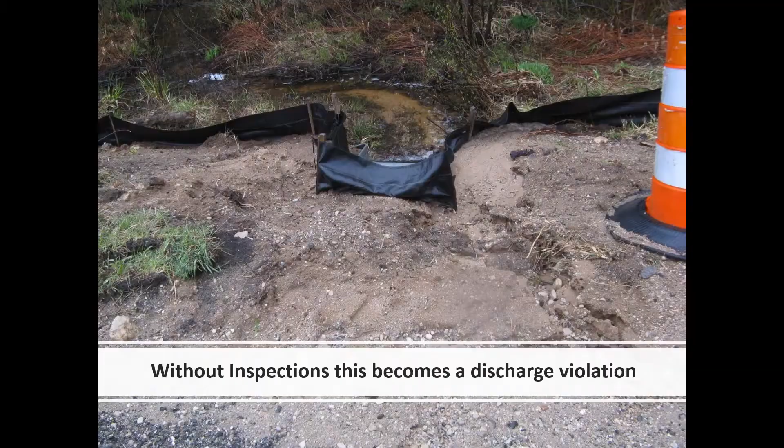The next item that EGLE staff will review are inspections. Adequate inspections and follow-up maintenance are essential to minimize erosion and off-site sedimentation at sites. We tend to hear about the major issues, right? Just remember, timely inspections and proper maintenance can help prevent smaller issues from turning into the major issues. It is the regular inspections that protect water quality and prevent Part 91 violations.

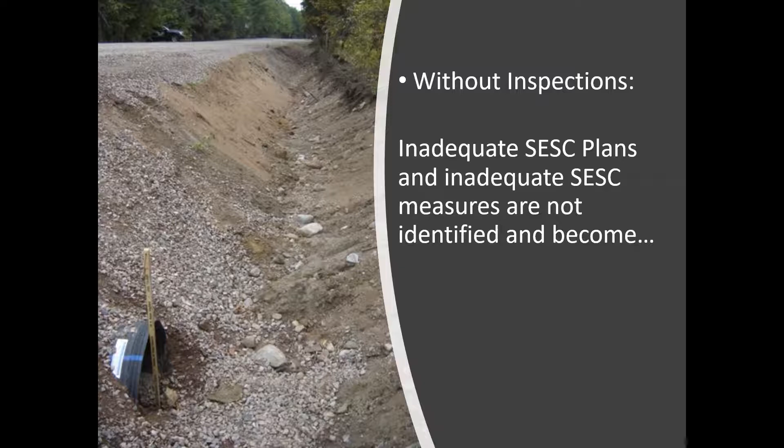Here we see silt fence in need of maintenance following a small rain event. Without proper inspections, this becomes a discharge violation to a stream and could become a major issue later on. Without inspections, inadequate SESC plans and SESC measures are not identified and could become a discharge violation 2 weeks later after rain. A lot of sediment can be moved in an unstable ditch, even in small rain events.

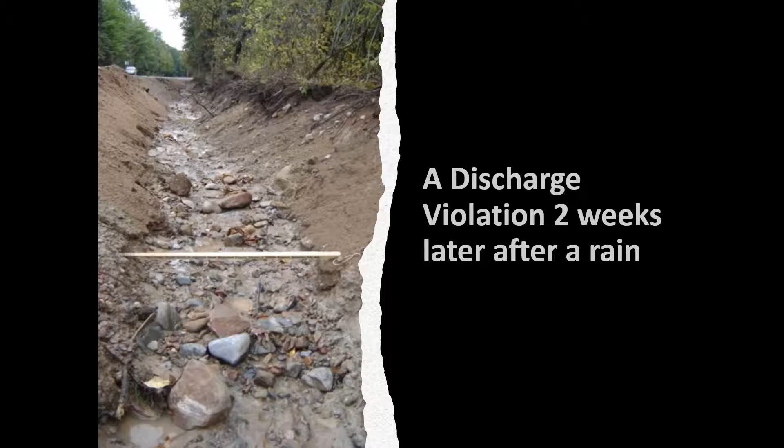A common question we receive is, what is the inspection frequency required by an SESC agency? Part 91 outlines the expectation for conducting inspections but the details on the frequency of the inspections are not well defined. EGLE will expect MEAs or CEAs to conduct adequate site inspections to ensure minimization of soil erosion and off-site sedimentation. That means you will need to make sure you're conducting an adequate number of inspections to minimize soil erosion and off-site sedimentation. Proper documentation of inspections is one of the most missed elements found during our audits. EGLE staff will have no way to verify that you are performing your site inspections if you are not documenting them.

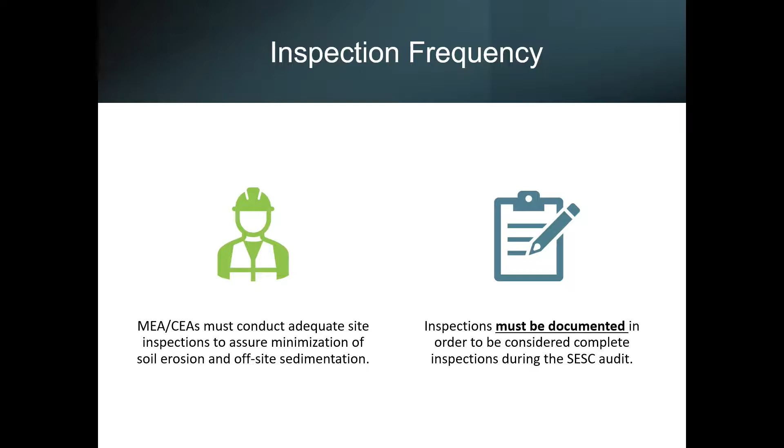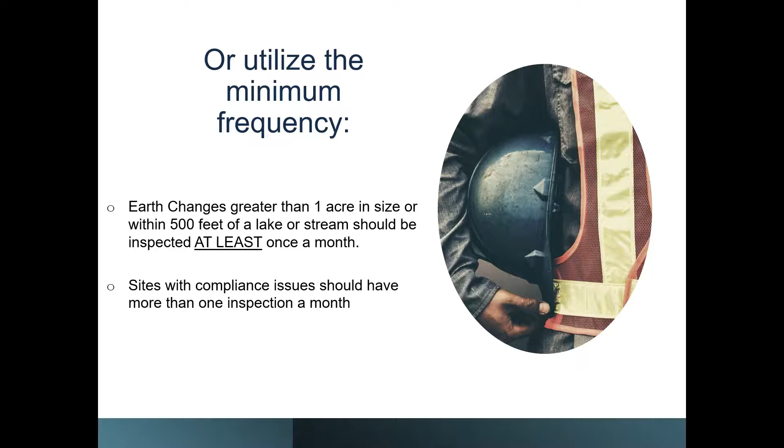One tool an agency may use to help determine the number of times a site needs to be inspected is called a site prioritization matrix. These matrices must be approved by EGLE and will define inspection frequency based on site risk factors, which can include the size of the disturbance, the time and length of the disturbance, flow conditions, the time of the year, soil types, or slopes. If an agency is not utilizing a site prioritization matrix, they should be utilizing the minimum inspection frequency. This includes inspections on any earth changes greater than an acre in size or within 500 feet of a lake or stream at least once per month. Any sites with compliance issues should have more than one inspection per month.

When EGLE is reviewing inspection records, we will expect to see that inspections are being documented in an inspection report. While there is no required form for inspections, EGLE does have a template available for use by agencies. EGLE staff will be reviewing the inspection reports for inspection quality. The minimum items that should be included on inspection reports are the conditions of the site and SESC measures, any needed corrective actions, if there were any previous corrections that were completed, the date, the inspector's signature, and these records should be maintained for 5 years so that EGLE can verify them during an audit.

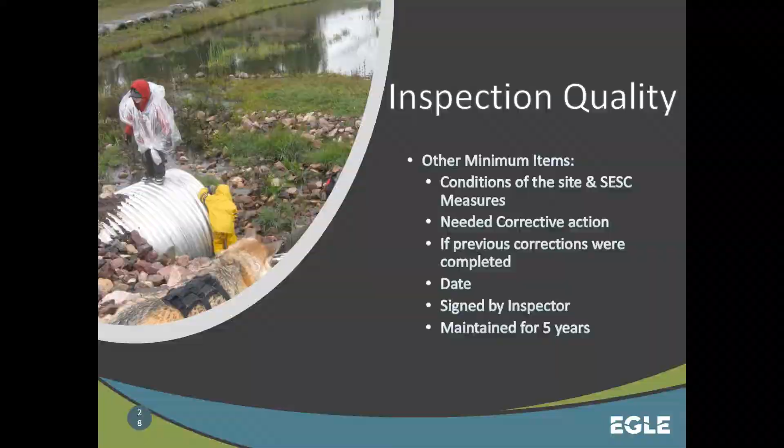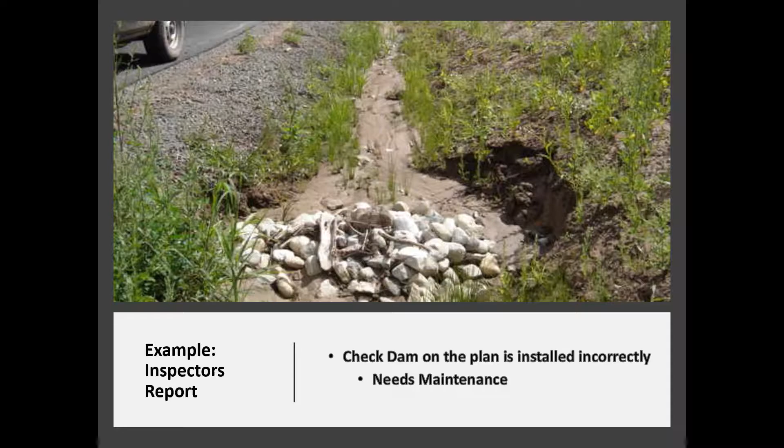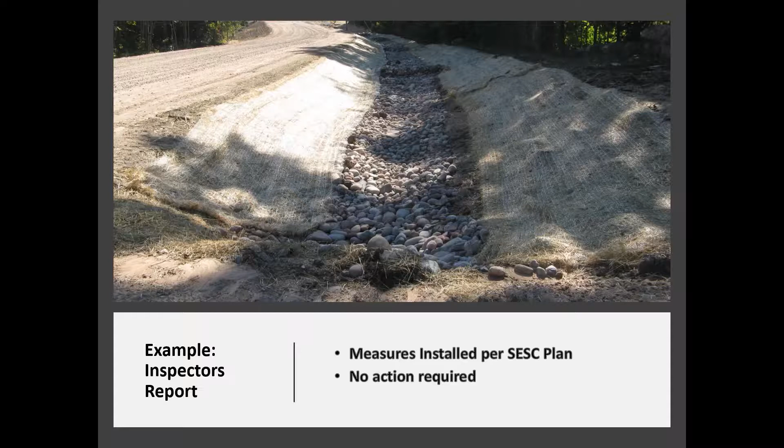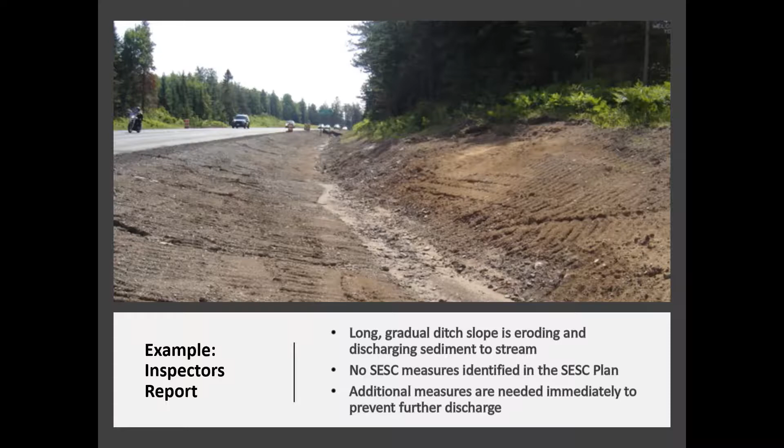The next item we'll review during an audit are the agency's compliance and enforcement procedures. EGLE recommends that each agency have a set of enforcement procedures. Clear and precise compliance and enforcement procedures will ensure consistency between sites and will assist with any problem sites that may need to be elevated for prosecution.

EGLE staff will be reviewing any documentation of enforcement efforts performed by the agency, and we will be looking to see if proper follow-up on sites has occurred. Remember, if a site has a discharge of sediment to waters of the state, they have 24 hours to stop the discharge and 5 days to have fixes fully implemented. Once again, documentation is important to verify that compliance and enforcement efforts are adequate during an audit.

Next, staff would be looking at the SESC plans that are included in each site file at the agency. Rule 1703 requires that 12 items need to be included on SESC plans. This is often one of the most missed areas we find during audits.

The 1703 requirements include a map or maps at a scale of not more than 200 feet to the inch, a legal description of the site, a site location sketch that includes proximity of any proposed earth change to lakes and streams, predominant land features, contour intervals or slope description, soil surveys or a written description of the soil types of the exposed land area contemplated for the earth change,

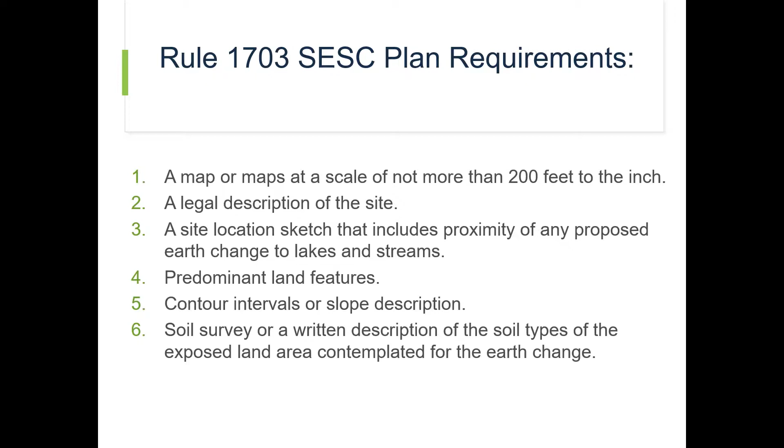a description and the location of the physical limits of each proposed earth change, a description and the location of all existing and proposed on-site drainage and dewatering facilities, the timing and sequencing of each proposed earth change, the location and description for installing and removing all proposed temporary SESC measures, a description and location of all proposed permanent erosion and sedimentation control measures, a program proposal for the continued maintenance of all permanent SESC measures, including the designation of the person responsible for maintenance.

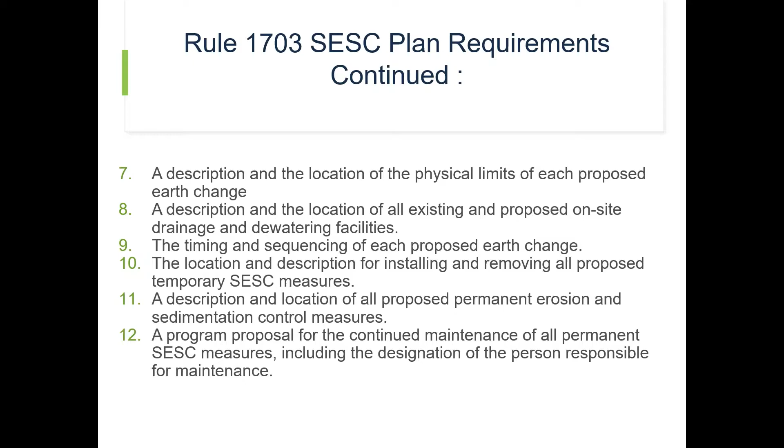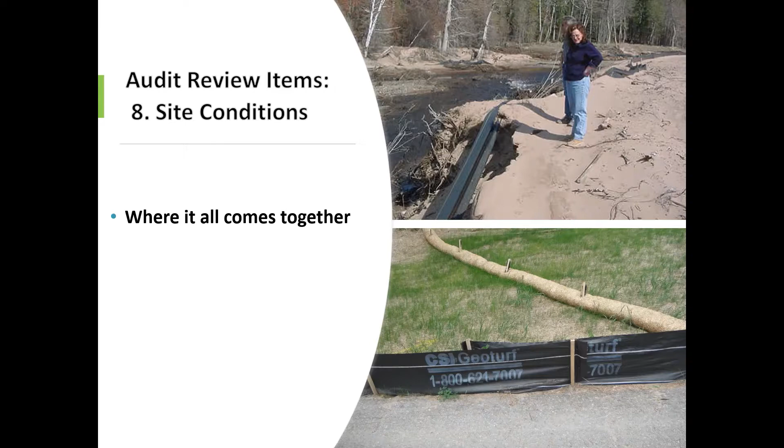The final area that EGLE staff will review during an audit is the on-site conditions. This is where EGLE staff will head into the field to check the site conditions of the files that were previously reviewed during the audit. The site conditions will allow EGLE staff to determine how well SESC plans are being implemented and give staff an idea on how well the agency is utilizing inspections and their compliance and enforcement. This is the step in the audit process where it all comes together. And it sure is nice when it all comes together.

Once again, after the audit review is completed, EGLE staff will send out one of two letters, a program approval letter or a 60-day letter, which will provide corrections that need to be taken within 60 days in order to run an approvable program. EGLE staff will work with the agency during this time period to provide guidance and assistance on how to make any required corrections.

After receiving a 60-day letter, an agency will make corrections within the 60 days, and then a program approval letter will be sent. If corrections are not made or not adequate, or the agency is unwilling to fix the issues, a program disapproval letter will be sent. It is possible that the escalation of enforcement will happen after this step.

So what happens between agency audits? EGLE will continue to conduct notice of coverage site inspections and can conduct SESC plan review and file inspections in between audits. As mentioned previously, EGLE's goal is to conduct these types of inspections at least every 3 years to allow staff to have a better understanding of how the agency is administering Part 91.

Michigan has some amazing water resources around the state that are truly worthy of our collective efforts to protect. We appreciate your assistance in administering Part 91 effectively and helping to ensure that all Michigan residents can enjoy their water resources. On a final note, remember to reach out to your district EGLE staff for any assistance that is needed. Our number one goal is to assist in helping our SESC agencies run approvable programs that ensure Michigan's amazing water resources are protected for all to enjoy.